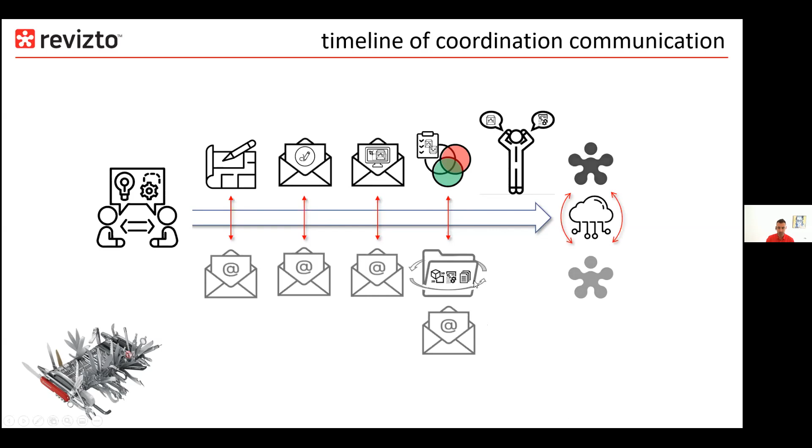And then when we get into the more technical review of bringing all this information together - clash detection - there's a myriad of ways to share that information as well, via PDF, BCF, and so on. This is very, very difficult to manage when you've got a team of people using different processes, different technologies, and in different locations. So context switching is something every project team struggles with.

Basically, Harvard put together this report saying we're losing productivity. In this ever-competitive environment, we want to ensure we're getting the absolute best from our team, our colleagues, and the technology we've invested in.

This context switching way of working is something we've addressed, and Revizto has been available for 8-9 years now, so you can do a lot of what we've just talked about in our platform whilst working remotely. With that in mind, I'll jump straight into the application. Here's Revizto, and we're lucky today to have somebody technical on the call, Lewis, my colleague. So in here you can see my project workspace.

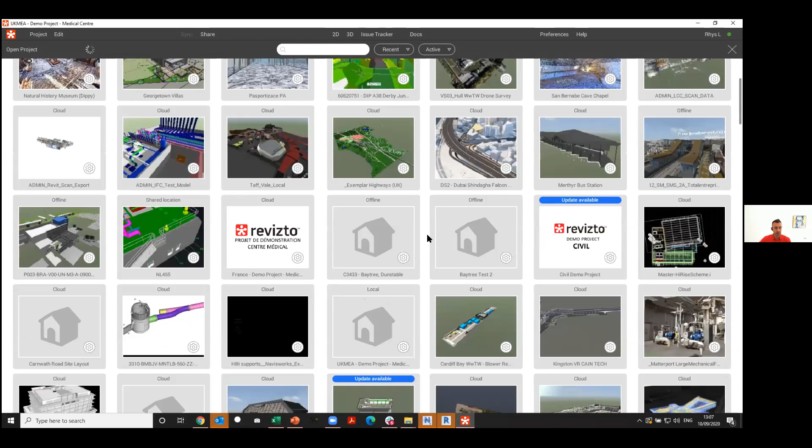There's lots of different types of projects that Revizto is used on - it could be an infrastructure project, an airport, a hospital. It doesn't really matter. What we'll look at today is one of the smaller projects we've got access to, which is a hospital somewhere in Australia.

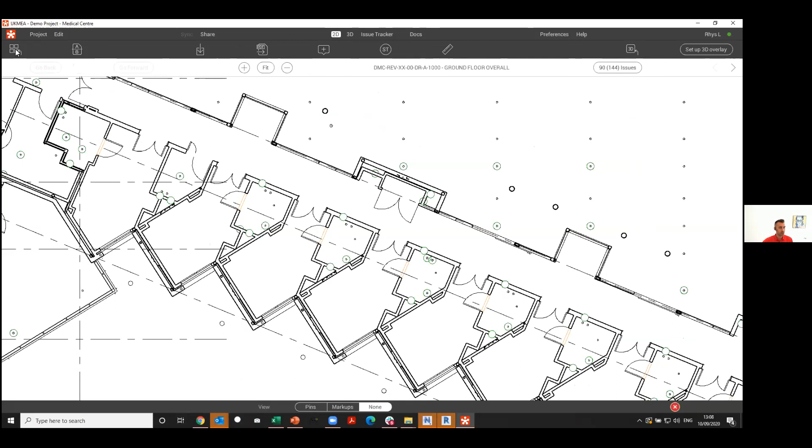In the application here, starting at the top, we've got 3 buttons effectively across the top. 2D - here's all of our 2D information, some architectural drawings. We've got a model that's come in from a variety of places - this could be from Revit, Navisworks, IFC, a point cloud - and we'll talk about getting that information through in a second.

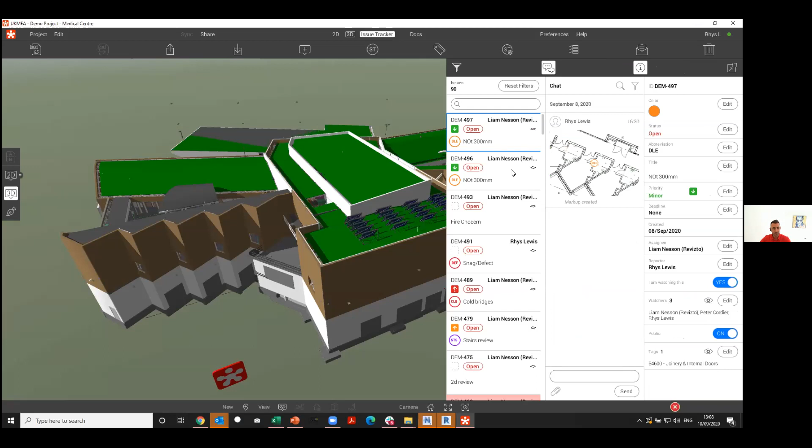This is the important part - this is now where all of our information around project-based tasks lives. In here you can see we've got marked up drawings, model information that's been reviewed. If I just reset the filters, you can start to see a wide range of tasks, issues, questions. I think we've got some clashes in here as well, so let's take a look.

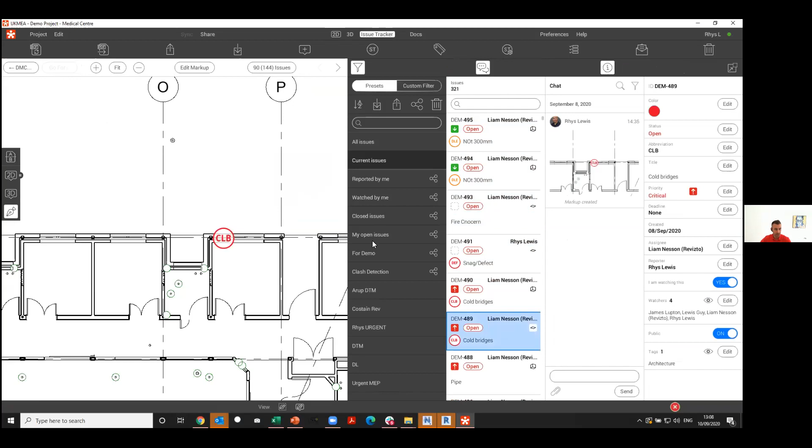Everything now is combined in this nice, lightweight, user-friendly interface, so we can start to track what's going on much, much quicker. First of all, let's start right at the beginning - I'm just going to take a look at this architectural floor plan.

So various project team members could be bringing it - let's say the architect has brought in their drawings and model from Revit, the structural engineer from Tekla, and we've got some information from the MEP team from AutoCAD. So all of that is now federated here in the Revizto space. So we need to get it there.

We can do that here, and I won't dwell on this - we don't have too much time today. We set the project up by exporting the information from our authoring package. There's a number of things I can take through here. You can see quite a nice tool here is the ability to set this automation up.

This will run now every Friday, let's say 7 o'clock - everybody's doing this. And we can take through the drawing sheets here, so we just take everything through, click OK, and this will export now for me once a week automatically. It's now available here in Revizto, where we can keep a log of all of the revisions.

So let's talk about some problems we have on this drawing sheet. First thing to mention is the drawings, the model, and all of the issues are tightly interconnected, and that's because our issue tracker is based on the project's coordinate system.

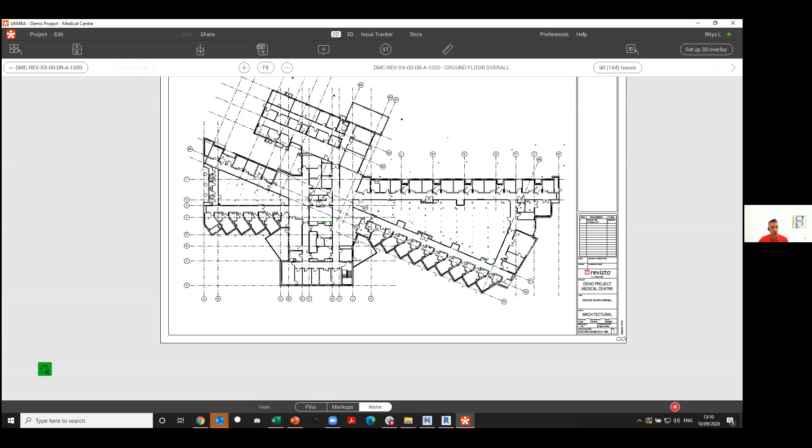Now, for me, not being a technical architect, maybe I'm the client here, and I just want to understand what this floor plan means in 3D. We've got this green icon here - if I click on that, that will now automatically overlay that 2D information on the 3D model for me. So this is a really, really powerful communication tool.

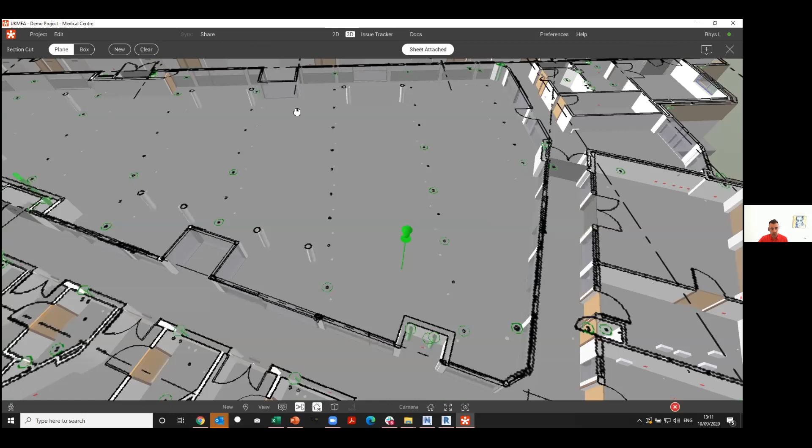But for somebody like Lewis, this helps him add another dimension to the way he coordinates his project. We may have different consultants using different tools, one working in 2D, one working in 3D. We can now combine that information and check 2D against 3D information. And everything I'm showing you today, we could do on our tablets.

So let's go back here. I'm just going to interrogate this drawing - let's take a measurement here, and we want to understand what the dimension is between these two walls. We've had a conversation with the team, and we need this to be wider to meet some fire regulation.

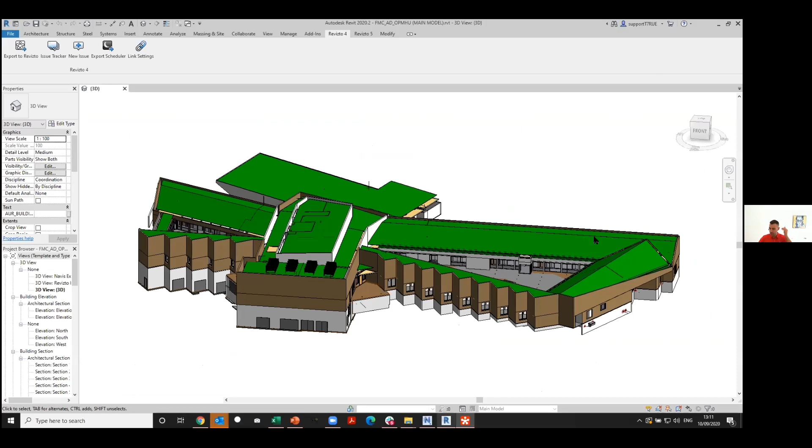So anywhere now in Revizto, we've got this plus icon. And in Revit, we've got the plus icon, and in Navisworks too. So no matter where you are, the process now of creating a task or an issue is exactly the same - there's no confusion about how do I create it, where do I log it.

Revizto takes care of all of that. So let's just position this marker, which is intelligent. It sits on the project coordinate system.

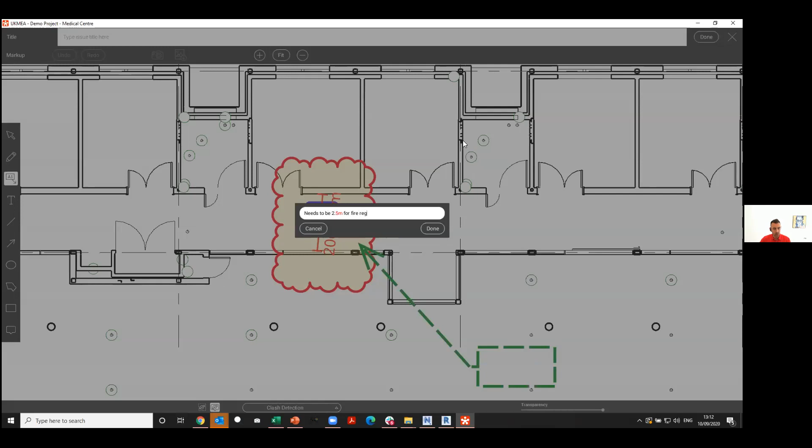I've got a myriad of tools here to mark this up, but in the interest of time today, we'll keep this simple. We'll say this needs to be 2.5 meters for fire regulation, something like that. Okay, so we click done. That gets logged. We can get as creative with the colors and styles here as we want, but I've not had enough coffee today, so that's as creative as I'm feeling. Fire reg issue, give it a name, click done.

What that does is it automatically logs that issue for me here in the issue tracker. It's given it a unique ID, and it now sits along all of the other tasks here in Revizto.

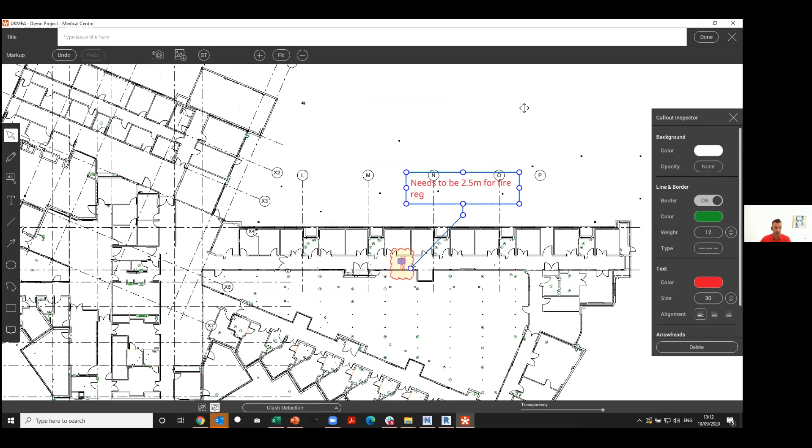Now, rather than having to print out a drawing, I may not be able to, I'm not in the office today, or create a PDF and send an email and all of that stuff we sort of just touched on. Let me clear my notifications here so people know I'm in the middle of something.

I'm just going to fill in these fields. So it's been logged, and I'm going to go through this list of information. Here are all the people I've invited to the project by clicking share and giving them various permissions, so certain people can and can't do certain things, very important.

So I'm just going to assign this to Lewis Guy. In the interest of working collaboratively whilst not being sat next to one another, I just wanted to demonstrate how Revizto can help you do that.

So I've assigned this to Lewis. Lewis is in London, I'm in sunny South Wales, and he will have received a notification now in real time, and he will have been sent an email.

But I want this information to be added as well, so I want him to be aware of how important that issue is when I'd like him to take a look at this file. So hello from London, Lewis is online.

You probably heard that ping, but you can see now there's no need to wait for emails to be sent through or for Lewis to respond there. I've now got a notification in real time. So from a project perspective, we can see things are being delivered, and we've got a full audit trail of who did what, when, where, and why.

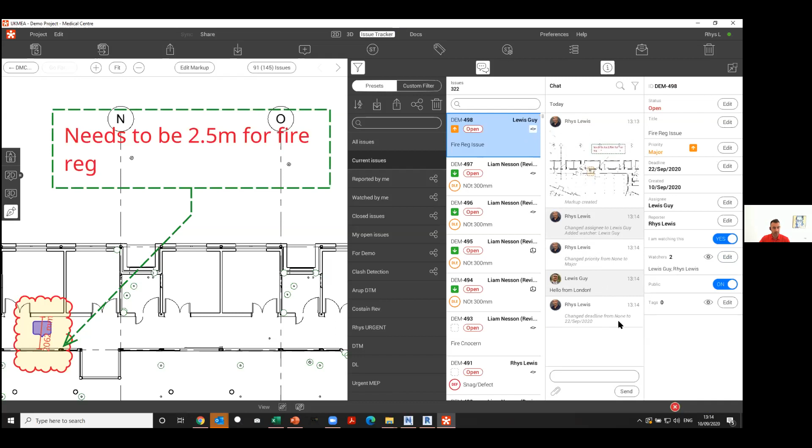So if we need to jump back to a problem or a task or an issue, we can find it very quickly and easily, and then understand what's gone on. Some other information here as well.

Maybe we'll add this as an architectural issue. We've created some tags, and these are really useful because all of these fields now allow us to provide rich reports. So if I just click on this reporting icon, in here we've actually got a number of, too many dashboards open there. Let's just take a look at this clean one.

This is taking us to the workspace where Lewis created some PDF reports here based on a site walk that we did last week with a client. If I just take a look at this dashboard, this now is being fed directly from Revizto whenever any of these issues or tasks are created, updated, or amended.

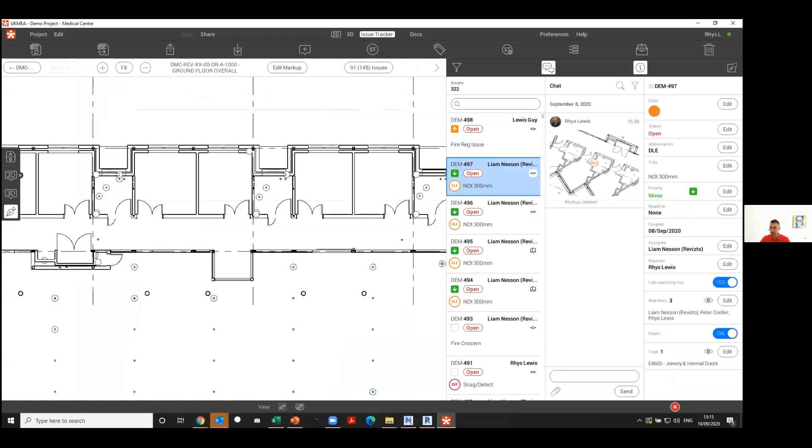So I'm not having to spend an hour or two a week collating information from emails, PDF reports, whatever it is. Everything's collected and reported for me here automatically.

Show me all of the clashes assigned to the architect on this project, please. Here they all are, all updated. I can see who has what assigned to them, the status of them, and these colors refer to statuses.

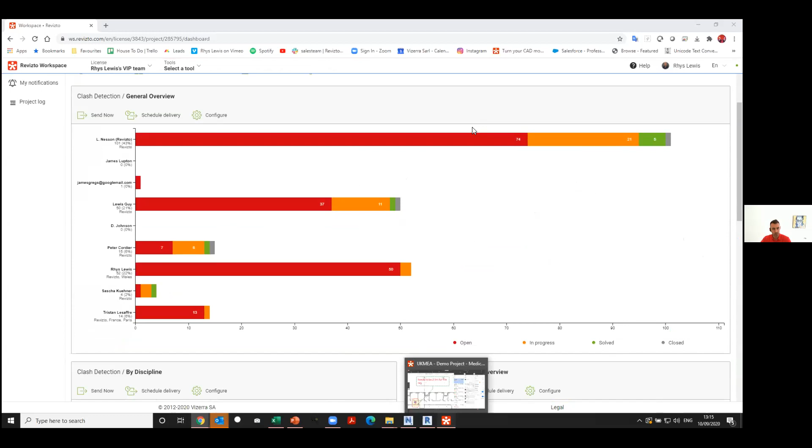So wherever we're looking at issues, that color gives us an indication on the status of it. So there in the dashboard, here in the issue tracker, we can see these red ones have been opened, and off we go. So we've created an issue in 2D.

I just want to explain the picks and clicks so you understand the mechanics here. So Lewis has come online, picked up that issue. I'm now going to change the status to in progress. Lewis will deal with it, mark it as solved, for me to then review and close out.

So Lewis can't close issues. That's my job, and only I have the permission to do that.

Okay, a bit more on this before we speed up a little bit. So this issue we position on this drawing sheet here, I mentioned it being intelligent and based on the project's coordinate system. I'm more traditional, I prefer to look at these construction drawings. Lewis prefers to be in the 3D space.

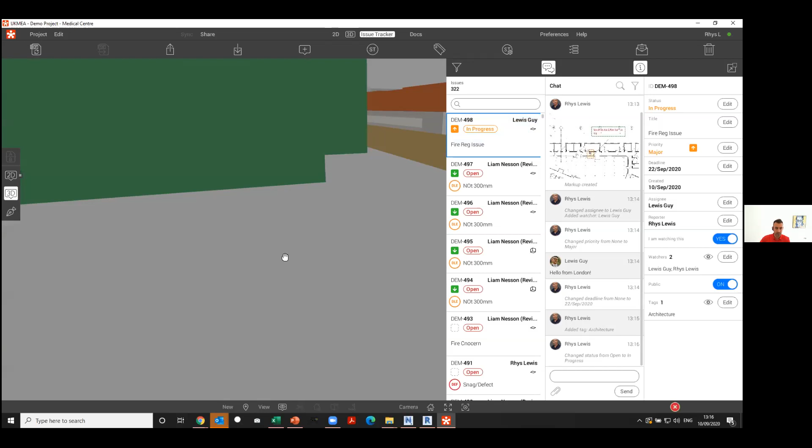So if I click on 3D, that's now taking me directly to that federated 3D area in Revizto instantly. So now Lewis is much more informed about what and where that issue is. Where he now saves much more time is locating where this issue is in his ArchiCAD, Revit, Tekla file. Traditionally, somebody's going to spend 5, 10, 15 minutes trying to find that drawing sheet.

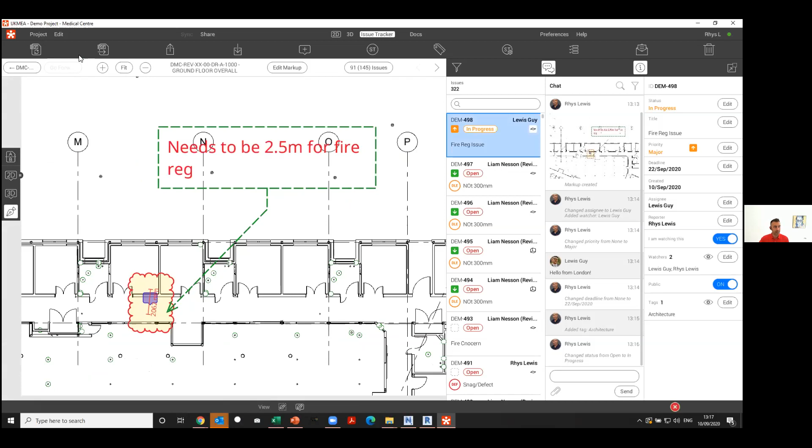So in Revit, all I have to do is link this project to Revizto. I've done that, so I'm just going to synchronize for now. If I double click on this blue box, just watch what happens. If this drawing sheet is linked in this Revit file, hopefully it is, we'll find out. There we go, that now takes Lewis directly to where he needs to be.

So we haven't had to pick up the phone and speak to somebody in another office, or have the luxury of tapping somebody on the shoulder in the same office. Revizto is doing a lot of those manual tasks on our behalf so we can get the job done.

Okay, and then that's now going to get updated. We've got the schedule running weekly. So what we can then do is check that that's been done by clicking on the 3D or 2D information in a week's time, and that will show me the most up-to-date drawing sheet to close that out or not.

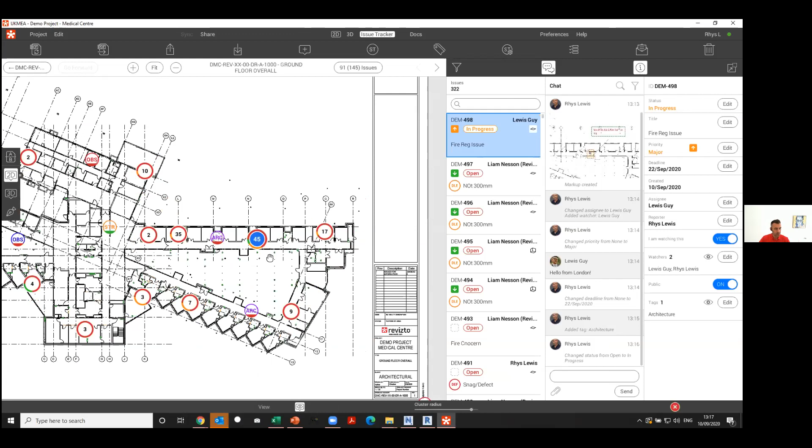And you can see here on that drawing sheet now that I've actually got access to every single issue that affects that drawing sheet, color-coded by its status, and we'll touch on that in a bit more detail. Right, let's jump to 3D now.

So if I come back to 2D here, jump to 3D, click in that room, and that takes me in here. So I'm not a technical user of some of these tools. However, Revizto adds another dimension now to the way I can review this information. So I'm going to use the gaming controls.

There's a number of things I can adjust here, but in 3D, using the gaming controls, I'm in fly mode now. I can start to navigate through this very large technical space without having to learn how to use some of these technical tools, which is great because I'm not an architect or an engineer, and I don't have a very powerful machine. I can start to do this now directly in Revizto on my tablet or my device. So I can fly through these walls, floors, and interrogate what's going on here.

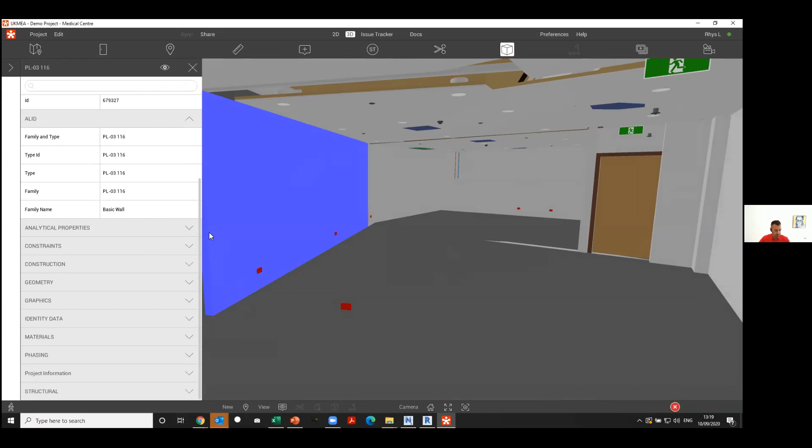And then, more importantly, ask a question. So all of this is an information model. It will now display to us all of this information that's come through as part of the export. And Revizto 5 allows us to do much more now with the data in the project here, where we can start to provide custom sets and understand where everything is.

We can take measurements. Let's cut a section through here. So maybe I want to cut a section through that particular area. And let's create another issue. So let's imagine that there's something that needs to change here in the service space, and we'll create another issue.

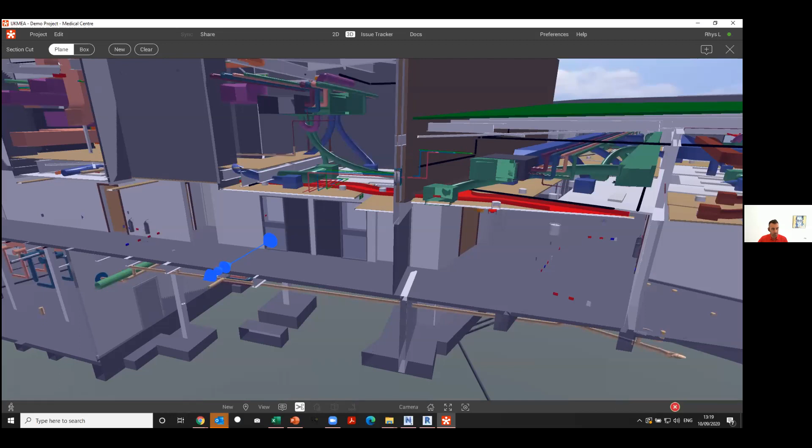Now, you remember how we create an issue in Revizto. We've got the plus icon there, so I'm just going to punch that there. We'll mark this up, I'll speed up a little bit now. Same process, we'll just call this an issue with MEP. Click done, that's been logged.

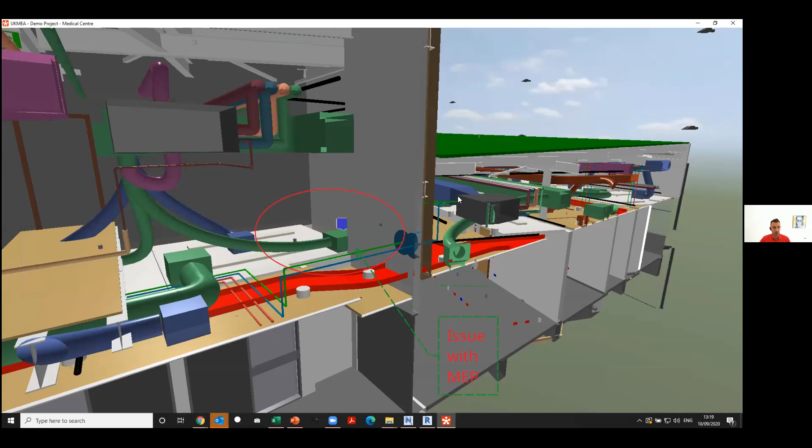Let's give it another name here. Done, logged, and that's been put here in the issue tracker. We'll fill in these fields as well, we'll give it a deadline. I'll assign that to Lewis again, and give it a priority, and that'll do for now. I'm not going to fill in these fields today, I'm feeling lazy. That'll move me quite nicely onto my next point.

So the process here of creating an issue in 2D and 3D is exactly the same way, and they've been logged here in one place. All of this, in the meantime, is being distributed and communicated to the team in real time, whilst all of our reports now are being updated in real time as well. So that's refreshed and updated accordingly.

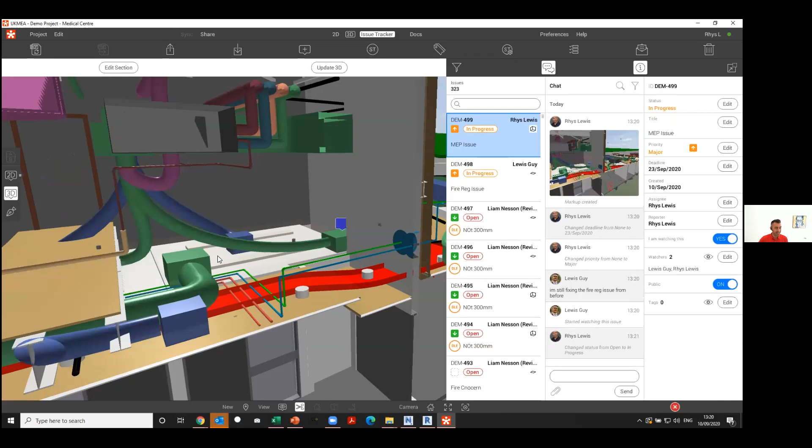Lewis is still fixing the fire reg issue from before, fine, but we know now that's been logged and it's in progress. Great, this works the same way. So in 3D, if we mark up, it'll tell us where those issues are across any single drawing that's been brought in from anyone in the project we've invited.

The big win here for Lewis, he explains to me, and feel free to jump in here Lewis, is when we're speaking to our clients about trying to locate issues where they've received snippets of models like this, that can take even longer to find, right, in some of the more complex, larger projects.

Yeah, no, absolutely, it's a big time saver. So hopefully, let's go back to Navisworks here and just demonstrate that.

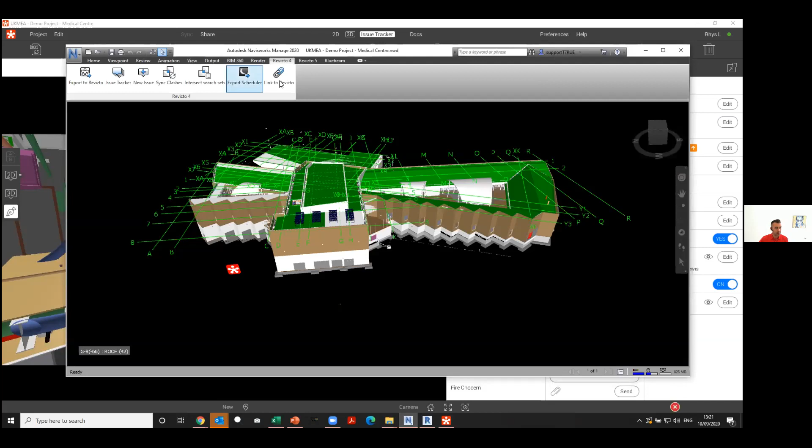In Navisworks, we have the same tools. I'll just click on the issue tracker button there, which now points Revizto to Navisworks. Double click, and there we go. So it works, and you can see it works really well, regardless if it's 2D or 3D, that switchback works really, really well.

So the engineers and the design team can deal with things much, much quicker. And we can create issues here in the authoring tool as well, on Navisworks. So I can go in here.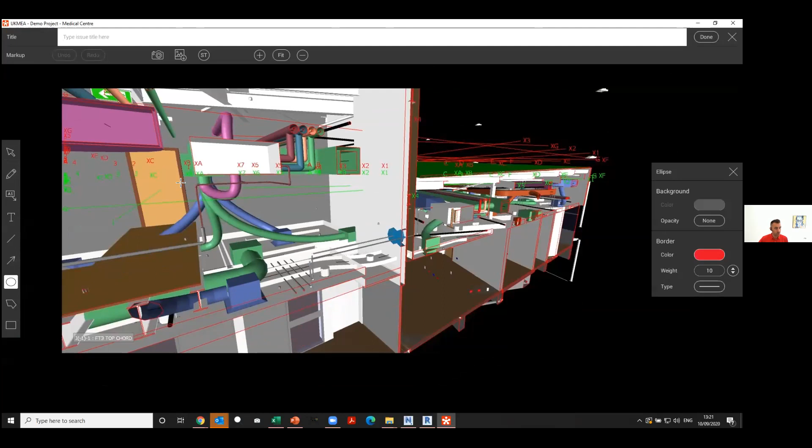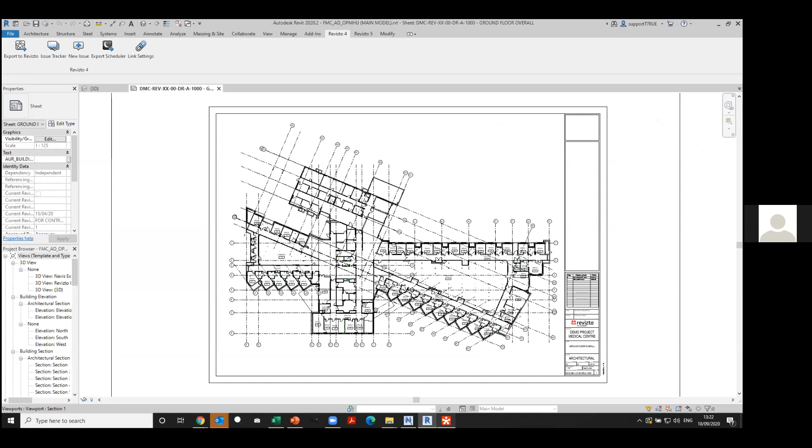Just to jump in with this while Rhys is creating this next issue, one of the big benefits with people no longer working sat next door to each other as they would be before in the office, is you can't just easily have that conversation with someone to say, where is it? What exactly are you talking about? Where is it in the model? Having that direct switchback functionality means that as long as the person creates the issue correctly, you don't even need to ask them where it is in the project. You just double click on it and straight away it will take you into the correct location in the model, so you know where it is, and you can fix the problem without having to start a whole new dialogue about it.

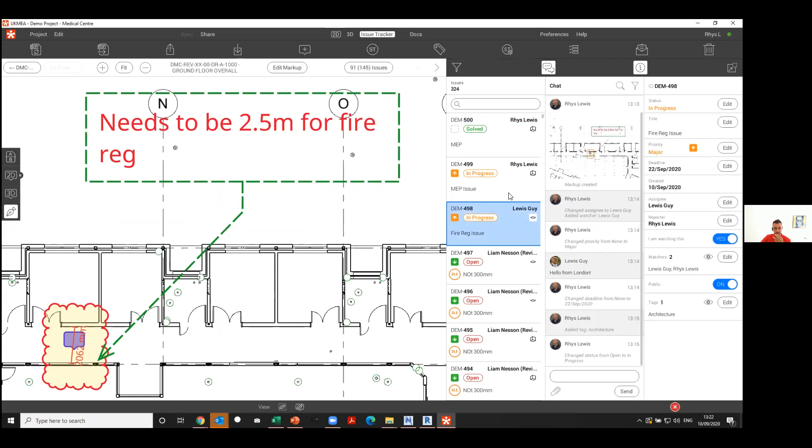Perfect. Thanks, Lewis. Lewis is working closely with a lot of our clients who are implementing this. There's two or three more things I just want to rattle through as the clock is ticking.

We've created some issues here, and you can see it's the same process. We've created one in Navisworks, one in 3D, one in 2D, but they've all been logged and are being tracked and delivered here in real time in one application. So somebody doesn't have to run around and bring all of this information together, which means things can get missed, and that costs us all time, effort, and money.

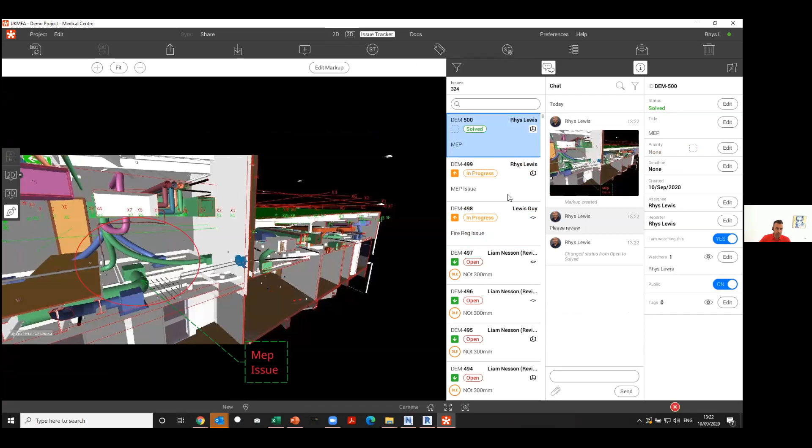You'll notice some of these fields here I didn't complete, and these are really useful because they're feeding our reports. So we thought we could automate the process a little bit or make it leaner, and we've done that using our stamps. Stamps are issue templates and allow the team to create issues with a single click.

Talking about going out onto site now, we can do everything I've shown you on a tablet, which I've got here. So the interface is exactly the same. Liam has just come online, and we'll try and do this in a second.

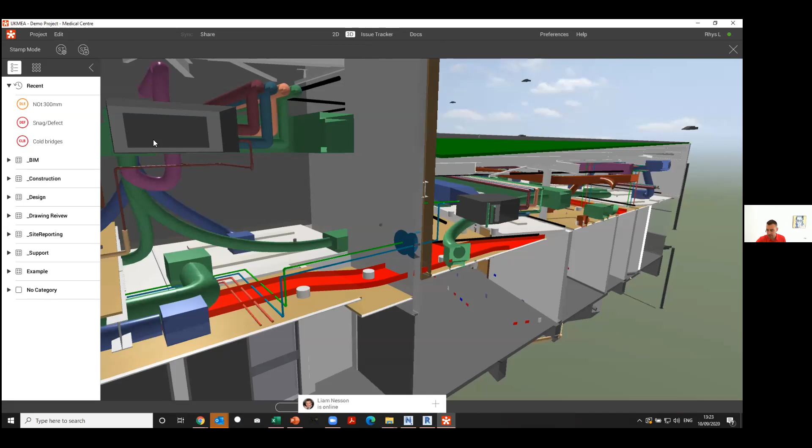So let's just come out here - I'm out on site. Let's go back to the home section. I've just walked down to the plant room, so I can jump into the plant room there, and something's been installed incorrectly. On the tablet, I select my stamps - we've got one here for snag or defect. So all I do now is click, click, logged, done.

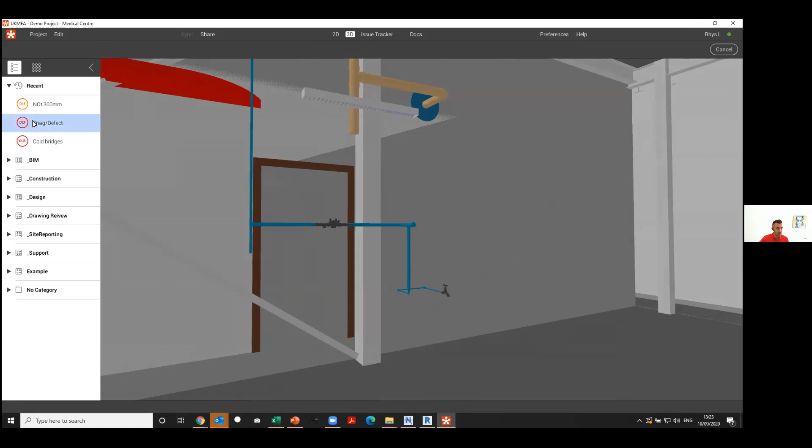That's now been logged, distributed in real time. And then on the iPad, I can take a picture, click snap, and that will attach that picture to that particular task. That could be a 360 image as well.

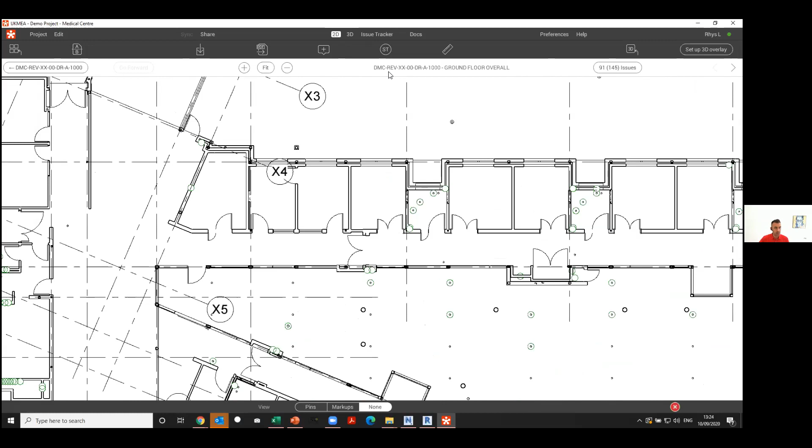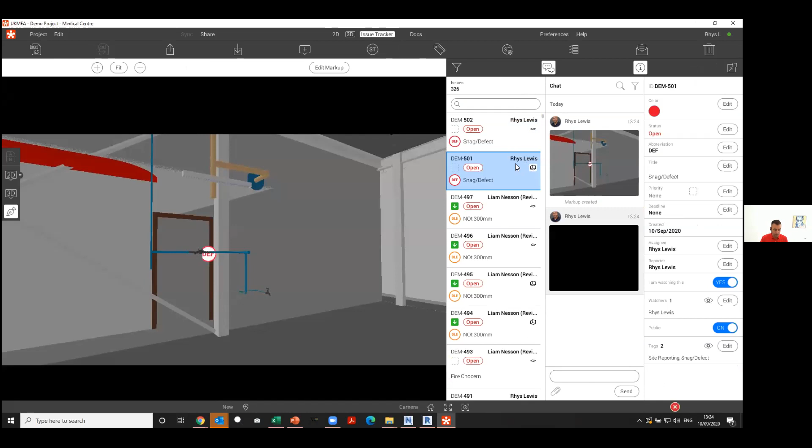Same with drawings - a lot of the site team will prefer to look at these in the drawings. We're in that room, a radiator has been installed incorrectly for whatever reason. So we click on that snag defect, click, click, done. Logged instantly. So I've taken 15 minutes explaining the first 3 issues I've created, and then created another 2 in a couple of seconds. These issue stamps really are helping the team pick up pace and move things along much more rapidly, because it's single click and all of these fields have been included for me.

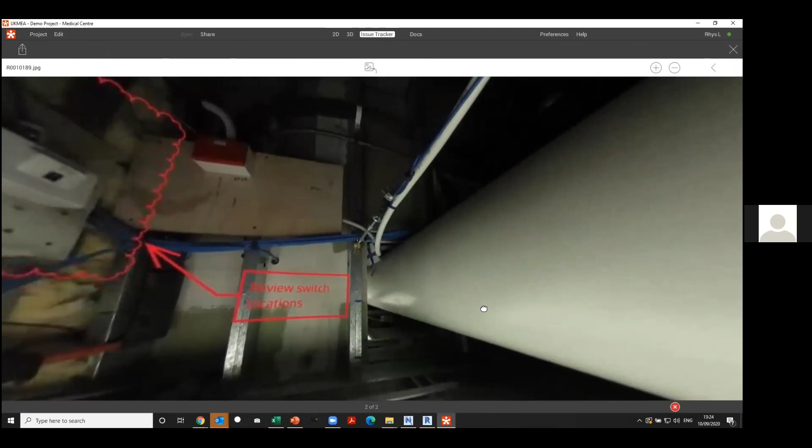Rhys, I don't know if you want to show the 360 image example that we've got, because this is really beneficial - not everyone has to go out on site just to look in the same space. You can take your 360 photos, and people working from home have the ability to still see exactly what it looks like above the floor, the ceiling void. You don't actually have to be on site up a ladder looking, so you can still work from home and still view what's going on site as well. That's also really beneficial for people.

Yeah, you got it. It's about that democratization and giving access to pretty much anyone - team in the office, working from home, at site. So Lewis could collect all of that data, bring it together into Revizto and distribute that to the 50 people on the project.

You can see here, I'm not on site, but I almost feel like I am. There's lots more we could discuss, but I just want to show you one or two more things.

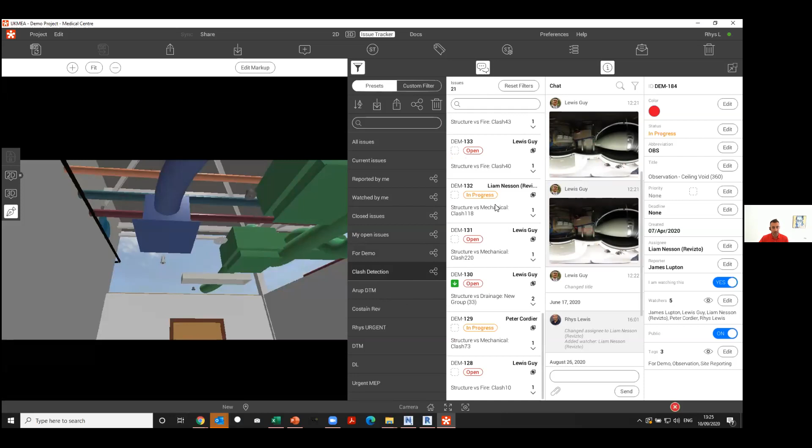So clashes are delivered in the same way, or treated in the same way, as the architectural floor plan issue we just created. They're tracked and delivered here via Revizto. For this example, these have been brought through from Navisworks by syncing them here. We could talk through the details, but we effectively run our clash detection in Solibri or Navisworks, import the BCF file or export out from Navisworks here into Revizto, and they're treated in exactly the same way.

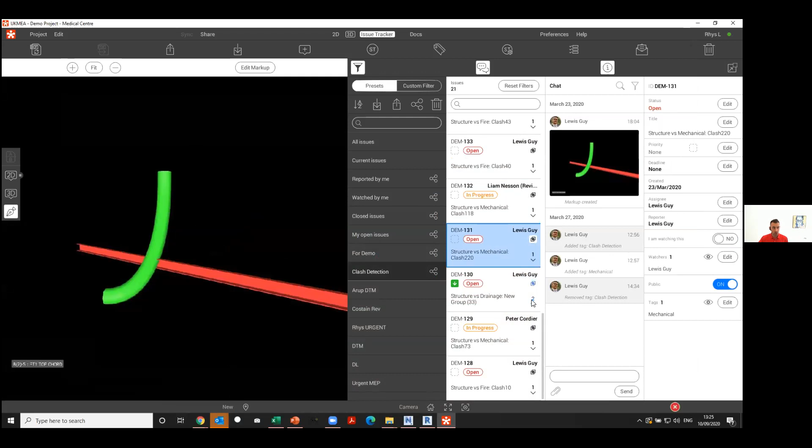So they've been assigned, we have the chat log. One thing that's really interesting here is if I click on one of these, where we've got some clashes that have been grouped, we can see where those are. We've got the ability here to change the view, so we can really understand what's going on.

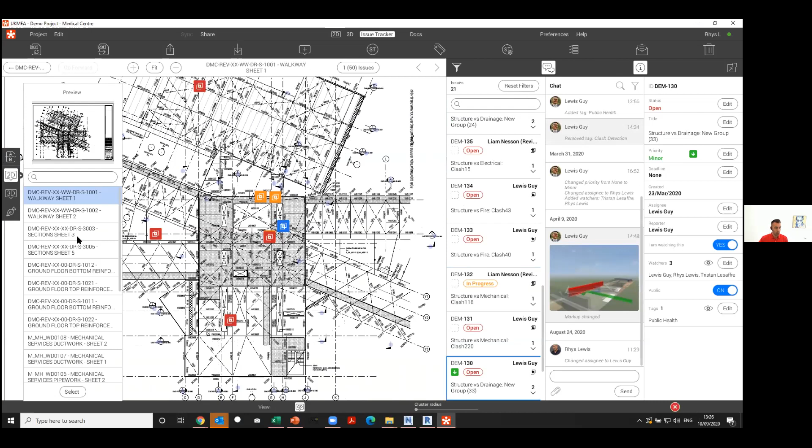We're coordinate system based, which if you've understood what I've been saying today, you'll understand what's happening here. So this clash has come through, and it now tells me what drawing sheets are affected by that clash directly in Revizto. We've got a 2D sheet compare tool as well, but in the interest of time and taking a couple of questions, one great feature I'd like to share today is the ability to do a camera share.

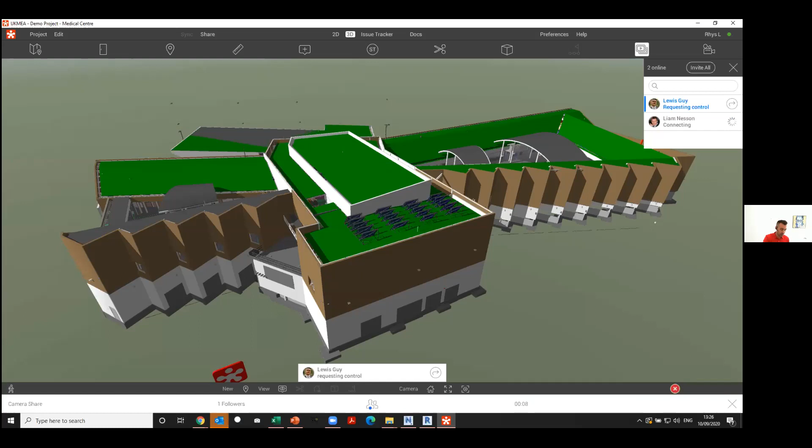Now what this is, I can invite the project team and have our design review session directly in Revizto. So Lewis has just come online. You can see here on my tablet that I've been invited in as well. So on the tablet here, we can see as I'm navigating through, I just jump around. You should be able to see, or maybe Lewis, you want to show us around a particular area.

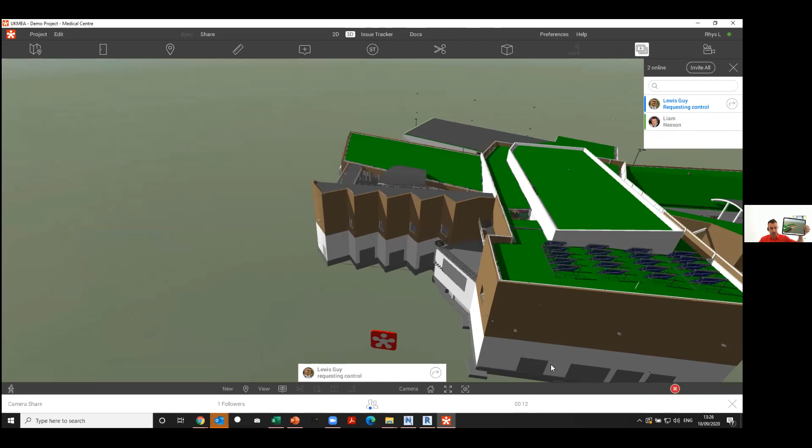So Lewis can request control. And what I'll do here is if we give him access, you can see my screen, a bit of Revizto inception here. And as Lewis starts to navigate around, we'll be able to see exactly what he's looking at in real time.

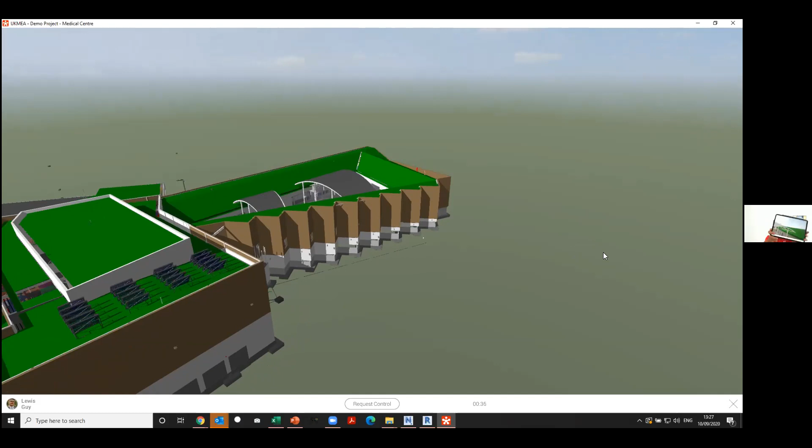Hopefully you can see my tablet, my screen, and both my tablet and my screen are here in my home office in Wales. Lewis is in central London, and we could have another 50 members of the team from various home offices right around the world. So Revizto really is the tool to bring project teams together, even more so at a time now when we need to collaborate.

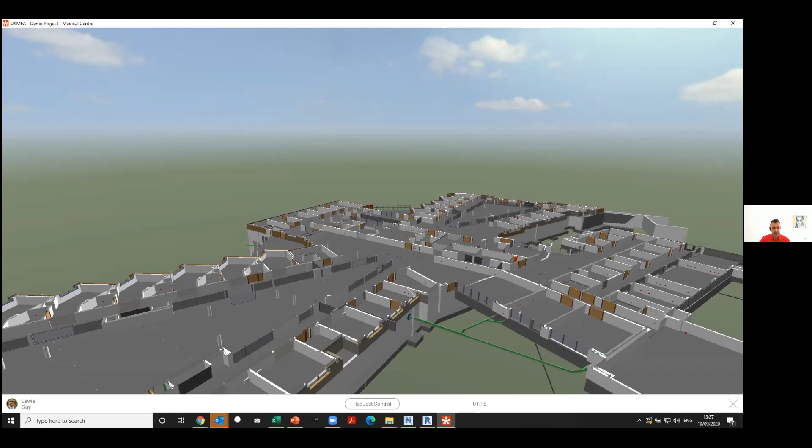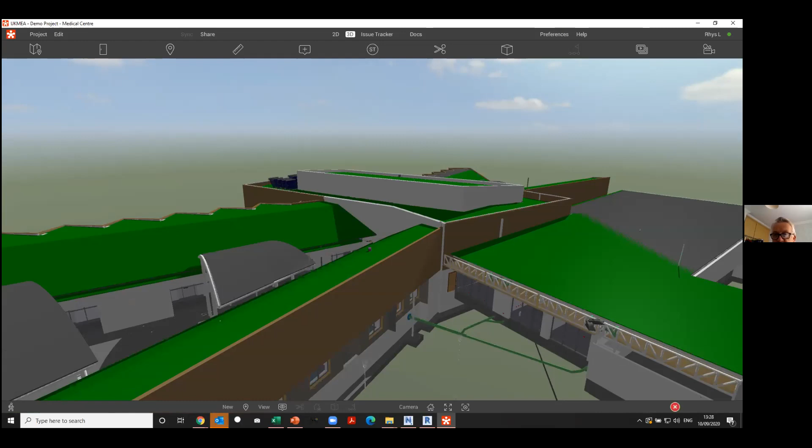Thanks, Lewis. Any questions? It's Alan here. How are you? Alan, I've missed you. I'm well, mate. How are you? Not too bad. God, the product has come on leaps and bounds, hasn't it? Really? Yeah, over the last while.

That last piece there really demonstrates the collaborative nature of the software, doesn't it? Oh, absolutely. And on that, Alan, what's been great for somebody in my role is to go back to clients and say, you know what, we understand your needs. We've listened and we've developed what you've asked for, tried our best to get as close as we can.

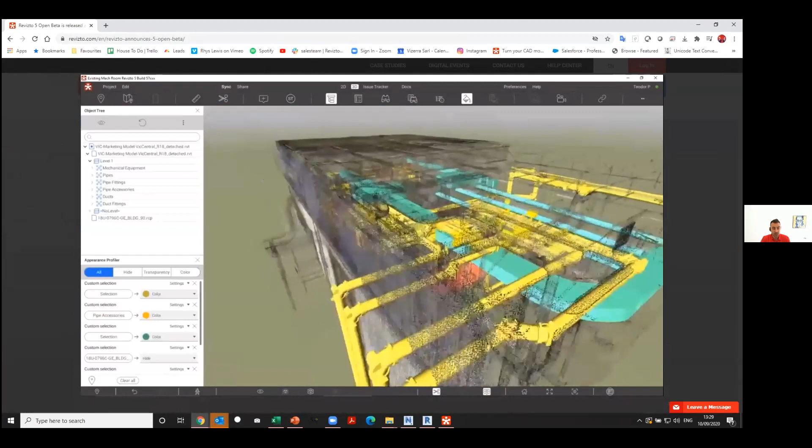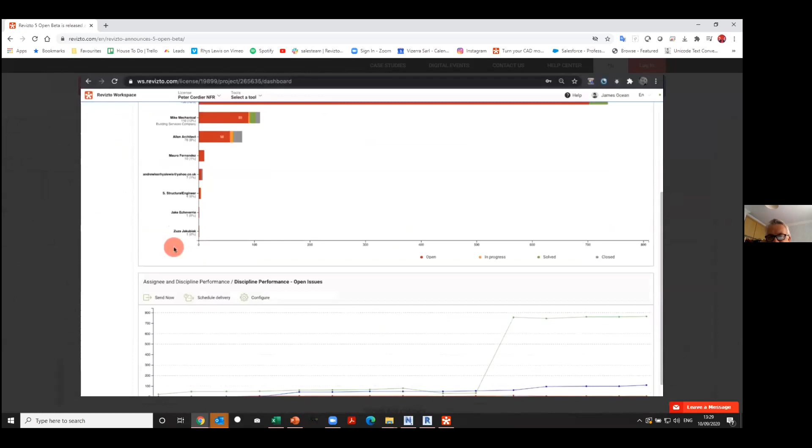Yeah, and I guess you haven't been doing as much traveling, Rhys. I hope all is well with you and the family at this time and so on. It's, yeah, no, it's been great actually, because I've spent more time at home with the family. So the little one may come in now and say hello to everyone if you're not careful. I told her I wouldn't. But we're actually busier than ever, we're in and out of meetings hour after hour.

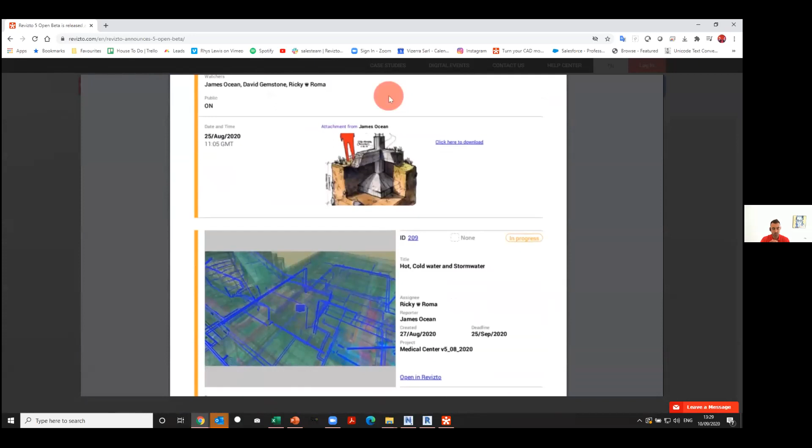So I do miss the 30 minutes in between meetings that you once got when you're driving to the next one or jumping on the tube or whatever it is. But taking everything into account, the message we're getting from our clients is everyone is still much busier than we would have thought if asked this question 6 months ago, and the industry continues to move forward digitally.

Yeah, maybe for Lewis as well. I mean, have you seen that with the pandemic there's been a real sense that people are being catapulted towards this technology now even more so?

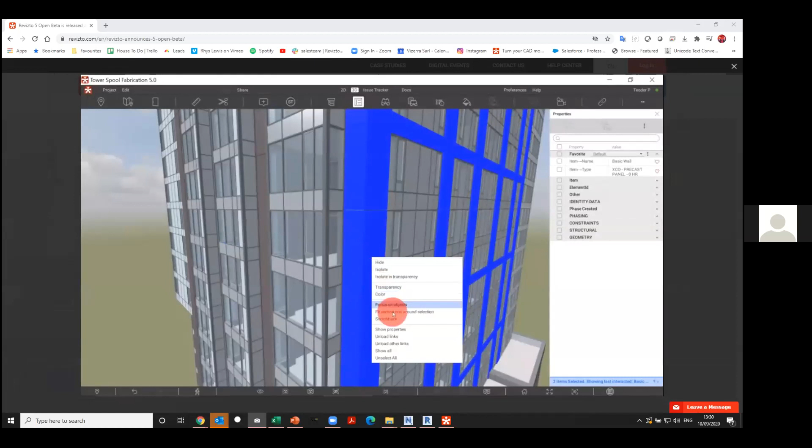I think that's been the best thing almost for the situation. There's not many positives to take from it, but the fact that it really has digitized the industry, it has made people realize that these are the platforms we need to allow people to work from home, but still get all the same functionality as if they were in the office. So if there are positives to take from the current situation, it's been the progress we've seen within the last 6 months in how quickly technology can be adopted across the industry.

It's taken a while for a lot of people to see it, but all of a sudden everyone's keen to work digitally, work remotely. I'm sure the number of Zoom and Teams meetings has gone up exponentially since lockdown.